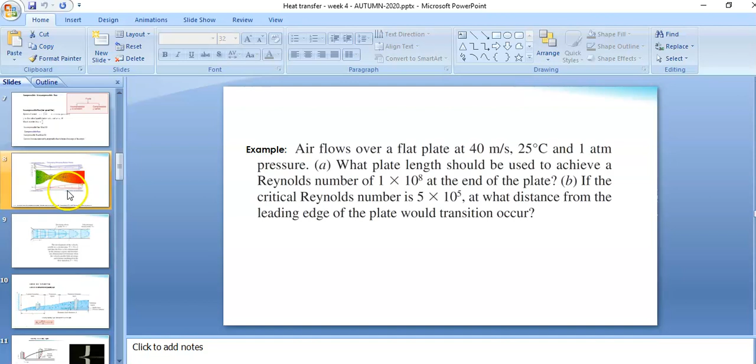So that's the first question. And if the critical Reynolds number is this, at what distance from the leading edge of the plate would transition occur? So if you can remember, during the lecture we already discussed this. So the flow will be laminar and turbulent. We already know that. Okay, when the flow is becoming turbulent, we say this is this distance, it is called

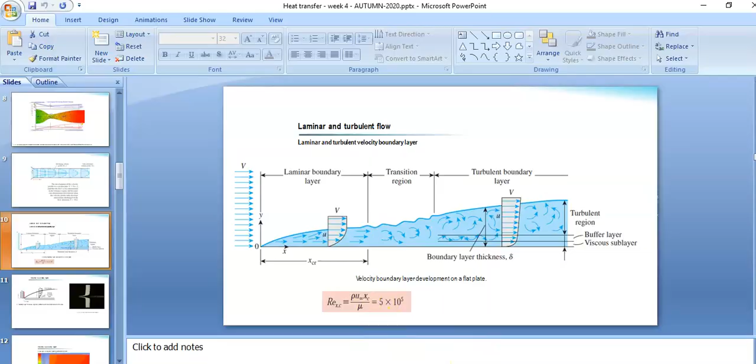the critical distance. And at that point when the flow will become turbulent, we say the Reynolds number will be 5 into 10 to the power 5. So this is actually the formula we know from the theories, that the flow will be turbulent at this point when the critical Reynolds number is 5 into 10 to the power 5. So when we are solving this question, the first question is we need to calculate the length where the Reynolds number will be 1 into 10 to the power 8, which is

definitely the turbulent flow. And the second part is we need to calculate the distance from the leading edge where the Reynolds number will be 5 into 10 to the power 5. That means when the turbulence will start. So we said isothermal conditions exist between the flat plate and the fluid flow, and the properties are constant. We got the kinematic viscosity, because we already discussed it when we solved the first problem.

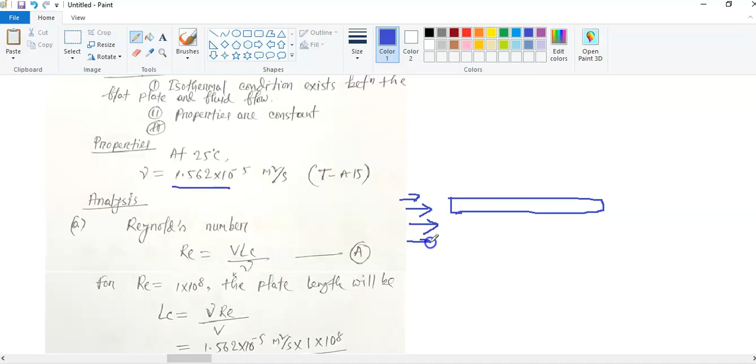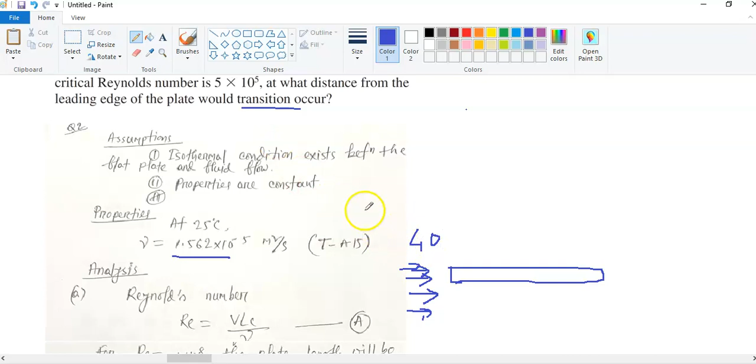So let's say this is the flat plate again. We have the free-stream velocity going this way. Okay, so this is the free-stream velocity. This velocity is given, 40 meter per second. So this is 40 meter per second. So for the first part, we will calculate what plate length. That means we will calculate the length.

We know the definition of the Reynolds number. So this is the general definition of the Reynolds number we used for the last problem. It is the free-stream velocity, characteristic length, and kinematic viscosity. Don't be confused. When I showed you the slide, maybe you saw dynamic viscosity and density. Actually, we all know the relations between kinematic viscosity, dynamic viscosity, and density. So here we are using the kinematic viscosity.

Anyway, so the Reynolds number here is 1 into 10 to the power 8. It is given, and the velocity is given, 40. We need to calculate the Lc. We already know the kinematic viscosity, so we can write Lc equals nu, the kinematic viscosity, times Reynolds number, over the velocity V. So if we substitute all values, then we'll get this length. We solved another problem, and this is very simple, so I'm not spending much time with this.

So the second part of this question is, at what distance from the leading edge will the transition occur? The critical Reynolds number is given, 5 into 10 to the power 5. So if this is the total plate, let's say at this distance the flow will become turbulent. So let's say this is the laminar section and this is the turbulent section. The flow will become turbulent at this section. So this is the stage when the transition will start. So actually the transitional state occurs just earlier. After laminar we have the transition and then the turbulent flow.

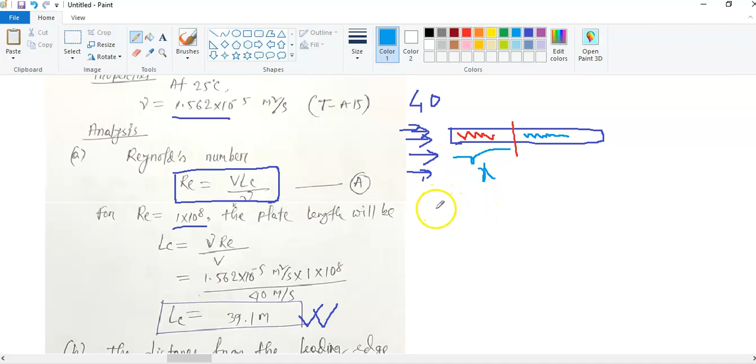Maybe when it is a cylinder or a sphere, then instead of the characteristic length, in some cases you need to use the diameter. So that we will explain later on when we solve this sort of problem. Maybe your tutor can solve some problems. In some cases you may get a Coke can. Okay, so we'll ask you. Anyway, just forget about it. Actually, don't let it confuse you. Just forget that.

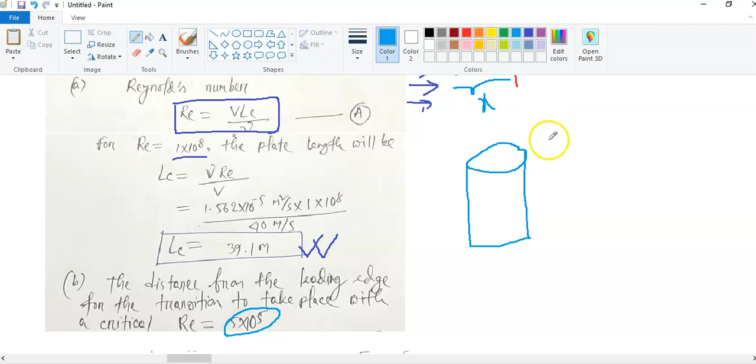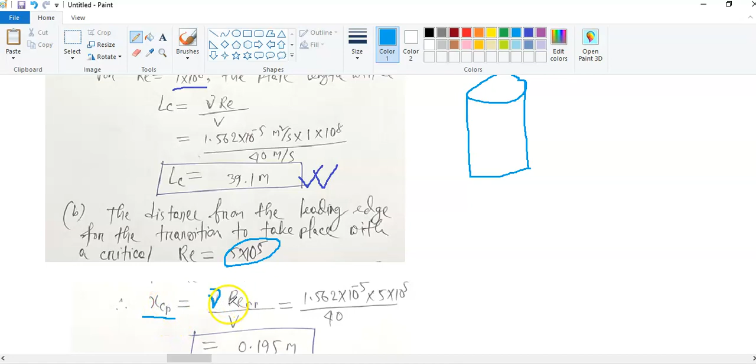So what we said is, this x is actually the critical distance. This cr means this is the critical distance. So it is the same formula. If I write it like this, let's say this is the critical Reynolds number, it will be equal to the velocity times this critical distance over the kinematic viscosity. So this is the same thing, we just simplified it. For this critical distance, I said xcr equals nu times Reynolds number over V. We substitute all values, we already know everything.

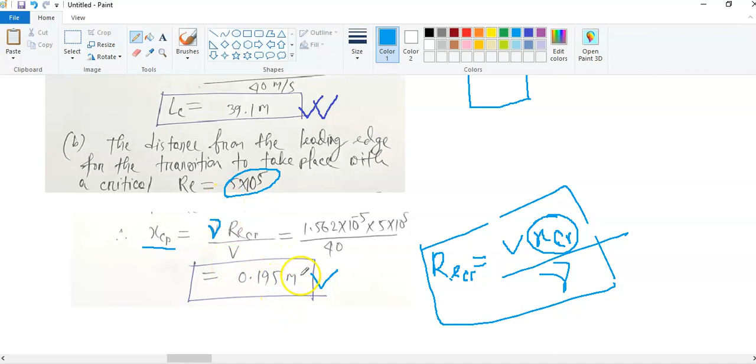So this critical Reynolds number is given, 5 into 10 to the power 5, and we got it is 0.195. So at 0.195, at that distance the transition will start and the flow will become turbulent there. So that's actually the solution of this question here.

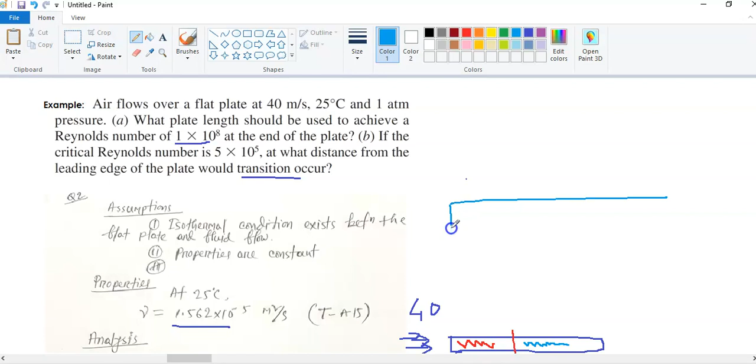In some cases, we may ask you, maybe in the final exam or in the quiz: you have a flat plate like this. Maybe it is 5 meter long. So this is definitely 0 meter. Let's say this is 1 meter, this is 3 meter, and this is 5 meter. We may ask, what will be the flow regime at x equal 3? It could be a question, you need to answer, you need to calculate the Reynolds number.

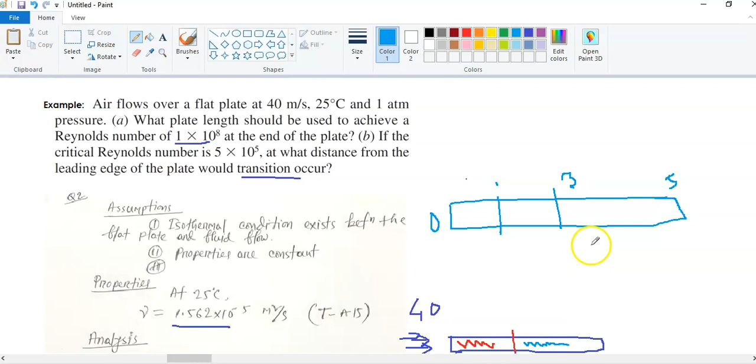We can say, okay, what will be the Reynolds number at x equal 5? Okay, so there can be different types of things. Maybe your tutor will discuss this during the tutorial session. So that's actually the solution of this problem.